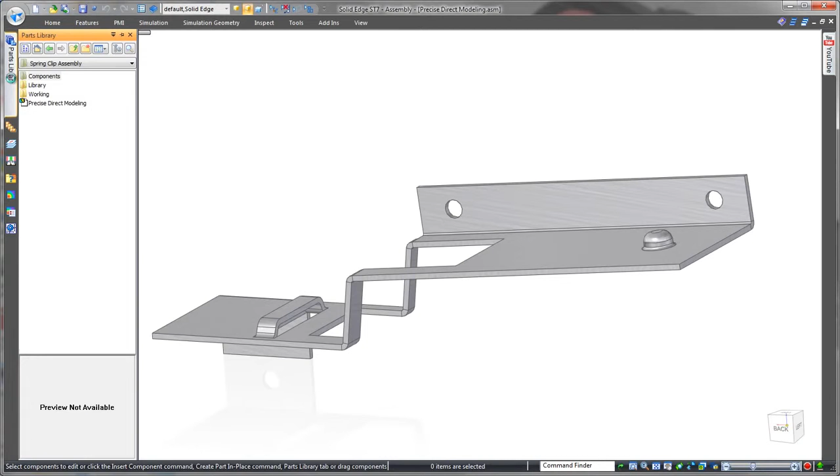First, let's bring in our spring clip and assemble it with the parts it was intended for. Clip to the base, and the USB block it needs to hold. The first precise change we need to make is to close up this gap between the top of the USB block and the spring clip.

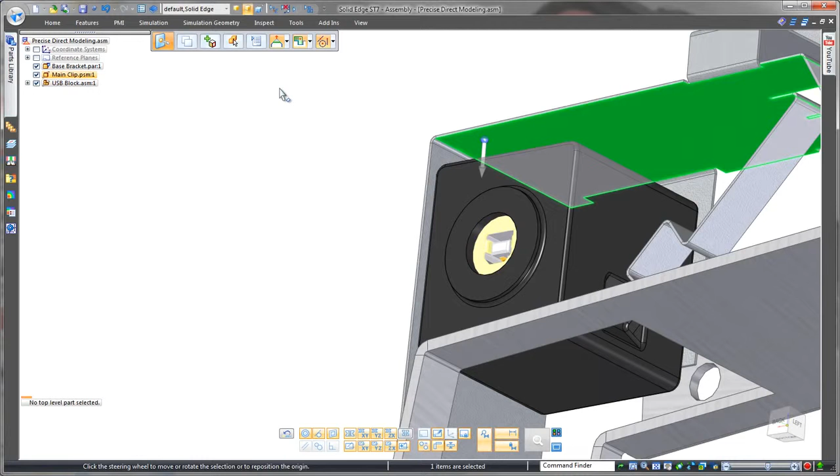In most any other CAD system, you'd have to make this change at the 2D sketch level with sketch relations. In Solid Edge, we can simply relate faces in 3D instead. Easy. Looking at the back, I notice the tabs on the top are not quite square with the top face. No problem, a couple more 3D relations will fix this.

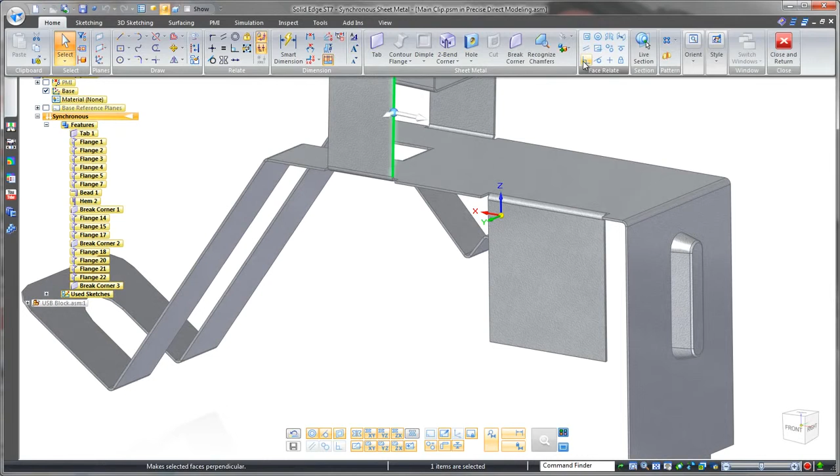For the side faces of the tabs, making them perpendicular to the top. And for the top faces, making them perpendicular to the side. And notice how both tabs are being updated here. That's the intelligence of synchronous technology.

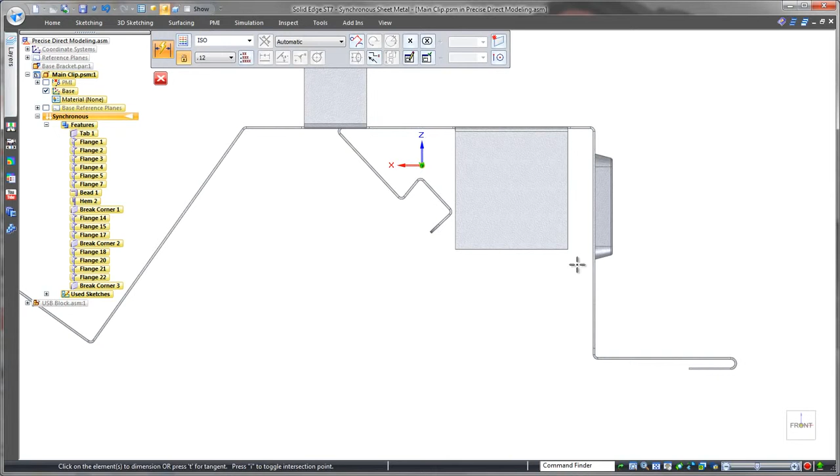Let's start detailing this model, and of course dimensions are key. Solid Edge has two main ways to dimension. The first is like most any other CAD system, in 2D when creating a sketch for a feature, but the second, which you see here, is unlike most any other CAD system, and much more intuitive. Just dimension the 3D model directly.

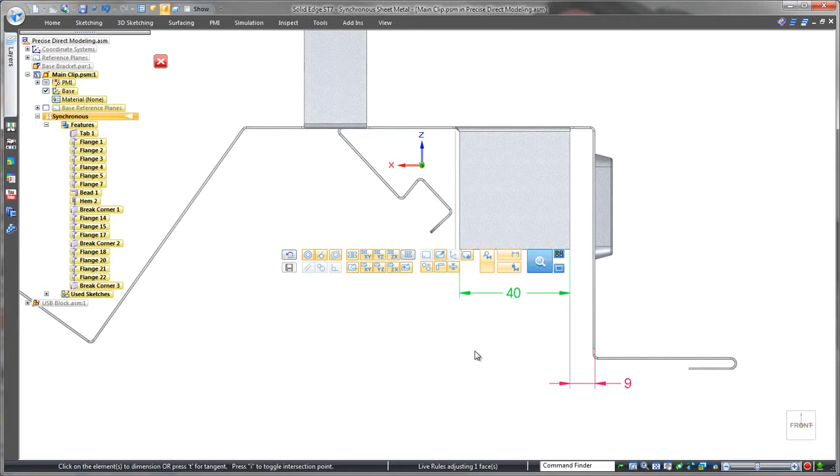We can leave this floating so that we still have the flexibility for further changes, or lock it down to be precise. We'll lock this down and we'll add another one for the flange width. We'll dimension these top tabs next, and look closely at the precise control that's provided. These green arrows allow us to control the direction of the change, which side moves and which side stays put, or even a symmetrical change if we wish.

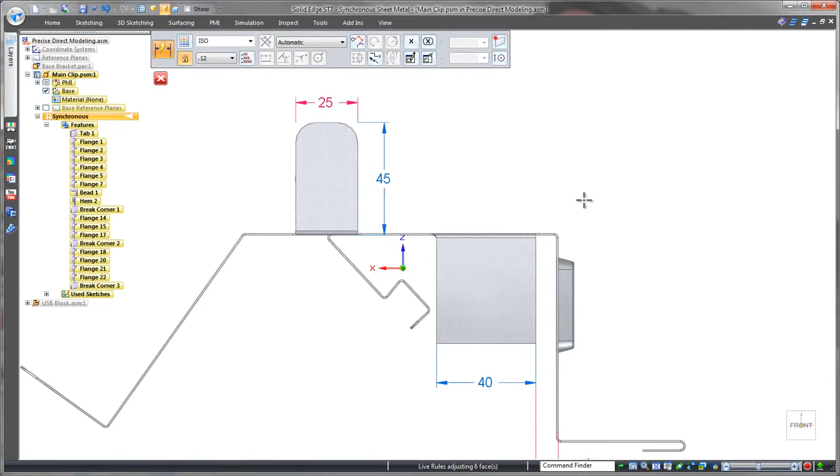We'll speed through adding the other required dimensions using the same technique, and for your information, the red dimensions are the ones we've locked down, and the blue ones are the ones we've left floating. Overall, notice how easy they are for someone else to understand. Great for reviews. Oh, and of course, we're not just talking linear dimensions, let's detail the angle here too.

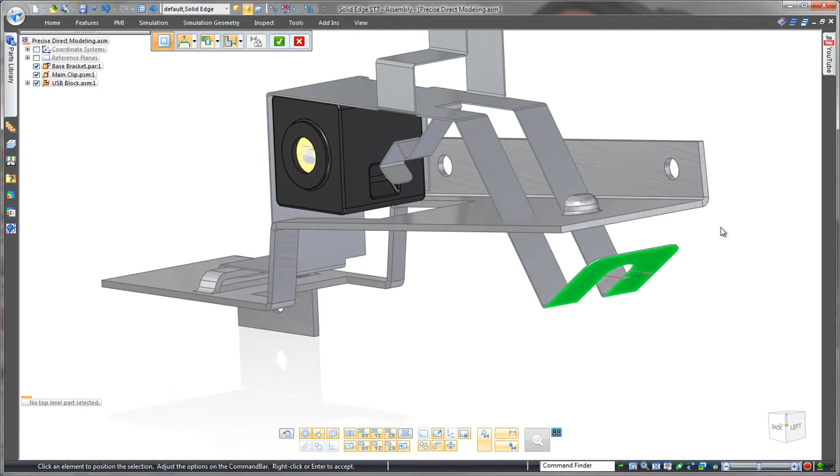We should finish working on the other end of the clip. Another 3D relation will do the trick to move and match the angle of this piece. And we can use what's called the steering wheel to drive a synchronous drag and snap into place here. And let's make sure that the whole thing is assembled centrally.

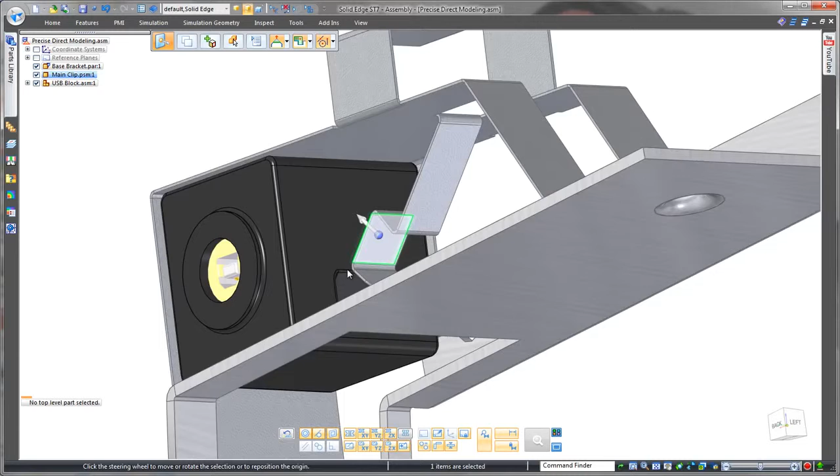Next up is the retaining clip that needs to slot inside the groove of the USB block. Once again, an easy face relation, or steering wheel drag and snap can be used. Whatever's easier. Perfect. One last sub-assembly to bring in, an inline fuse.

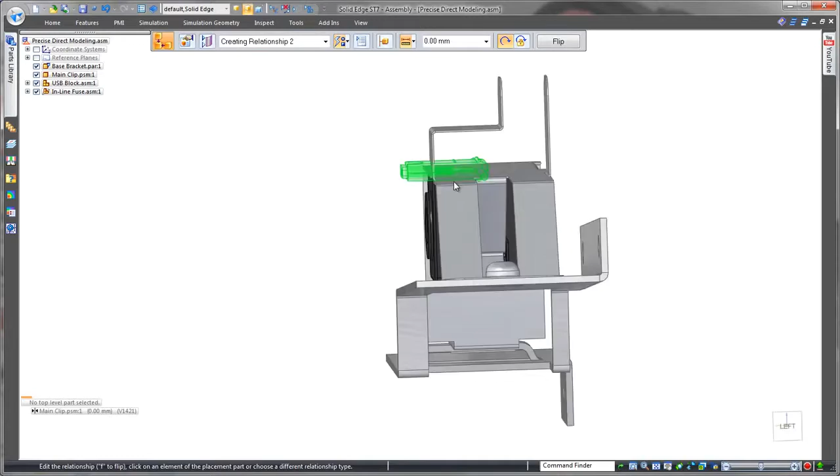The purpose of the top tabs is to support this, so we need to make sure it'll fit tightly into place. So let's make some more precise direct edits. Now I know the wire diameter is less than 3mm, so what we can do is drag the steering wheel to create a 3mm offset before dragging and snapping the tab itself. This leaves us with a 3mm gap, precisely how we want it. Let's drag this section in too, up against the fuse.

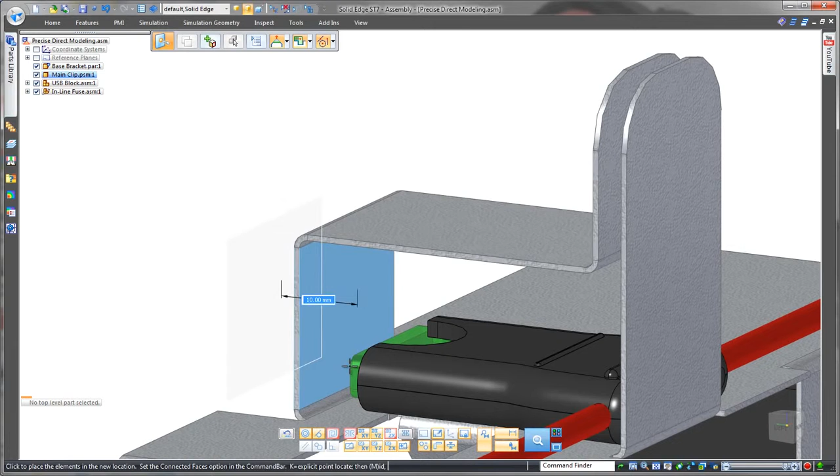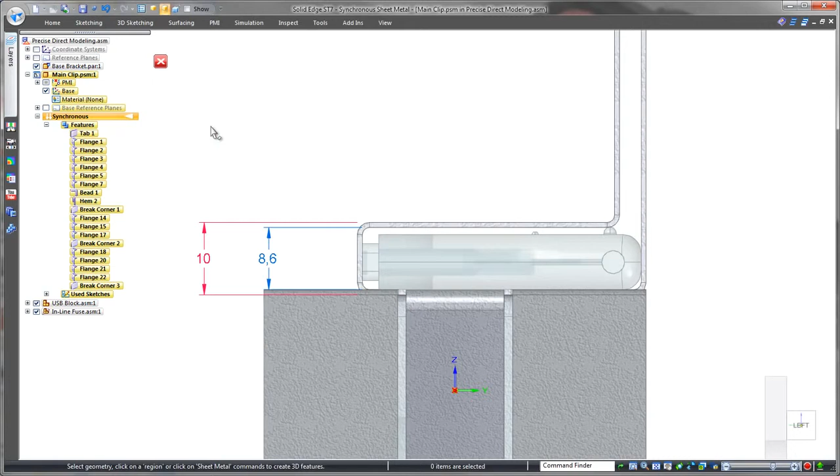Something worth noting is that for sheet metal dimensional control, we can design to either the outside or inside. It doesn't matter which dimension we change, be it inside or outside. Solid Edge will always take into consideration the material thickness.

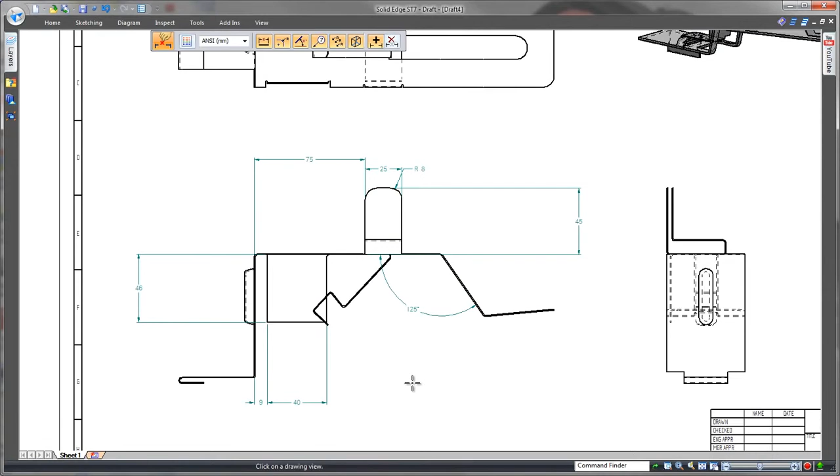Design complete, and of course it doesn't stop there. We can take this same all-in-one concept to final model into a manufacturing drawing. First of all, let's create a custom view of the assembly so that all aspects of the part can be seen. Let's have that shaded, and a few views of just the clip. And remember the 3D dimensions we added to the part? Look how quick we can bring those dimensions into this view.

So in summary, we've seen how Solid Edge with synchronous technology provides rapid direct modelling, but importantly with precise parametric control, relating faces, dimensioning, detailed drag and snaps, all in 3D, no sketch work in sight. Fast and easy, but most importantly accurate.